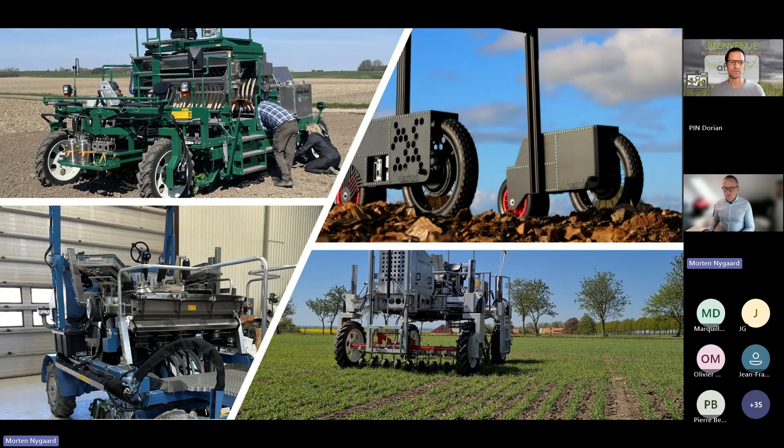You can start, Morten. You see the presentation now? Yes, we see it. So thank you, first of all, thank you for being able to join the AFMEX conference and for the introduction by Dorian.

And yes, I am here to present Technical Solutions for Agrosciences, a Danish company which is providing field trial equipment. This is our specialty and what we actually do. And I am going to share the portfolio which we have put together, calling it Precision Plot. Precision Plot contains a plot seeding unit.

It contains a plot sprayer to come, I will end up presenting that. And we also operate with plot fertilization. Additionally, in the work we're doing, we are looking into yield estimation by camera together with Harvest Eye as an example. So, our tool carrier.

So implementation of autonomy in field science. So why does it matter? Well, we are all being told to act more efficiently. And normally I would say we cannot run faster, but we can run more efficiently. And here we need to implement technology.

So normally a seeding platform contains a staff of 2, but by implementation of autonomy in here, we can actually reduce that.

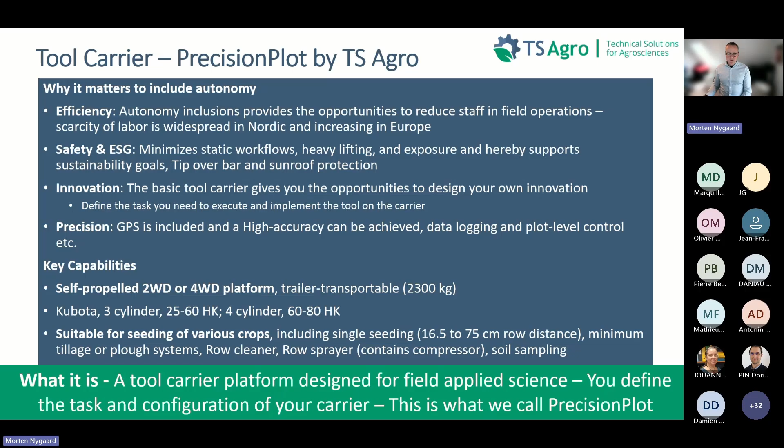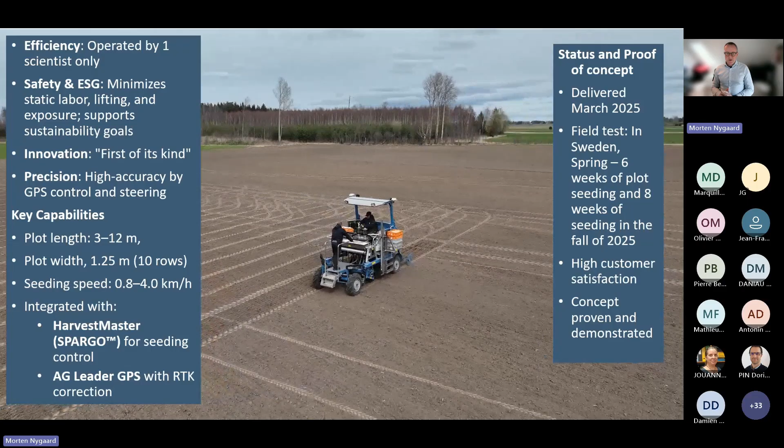So as a starting point, the carrier became a plot seeding unit for variety and fertilizer testing. We have now proof of concept. We have a unit which is now operated by one scientist. We have been called by our competitors first of its kind. It is acting on high accuracy based on implementation of GPS controlling.

We operate with plot length from 3 to 12 meters, depending on needs. We have a plot width of 1.25. And on this version, we have integrated SPARGO from HarvestMaster for seeding control. And we are operating with GPS RTK from AgLeader.

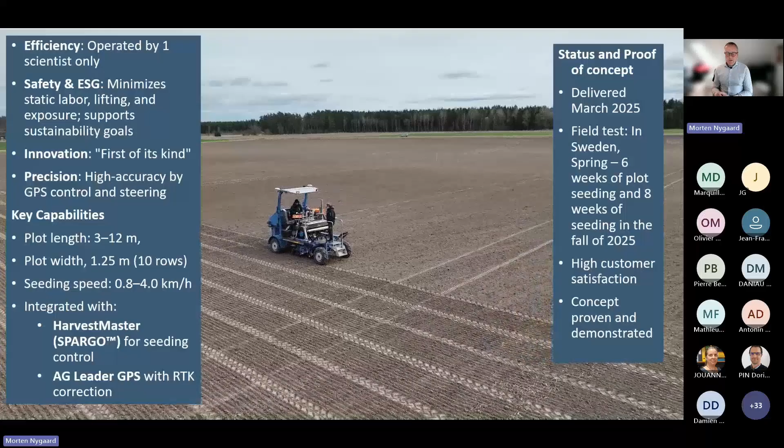The concept was delivered in March '25, so close to a year ago. It has had a spring season and an autumn season where the customer is expressing high satisfaction, and therefore we now consider it a proven concept.

When you go closer to it, from the seeding platform on your left side, you have access to, in this case, 2 belted cones. You have access to a seeding box.

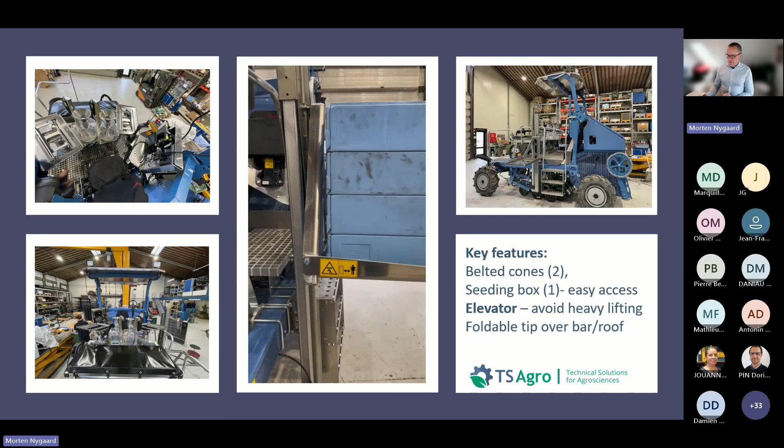From a work environment perspective, we have implemented an elevator. We all know the weight of a seeding box full of bagged seed - it's heavy, and now we can actually elevate it from ground level to the seeding platform. When not used, it's easy to fold and thereby not be in conflict with any other operations.

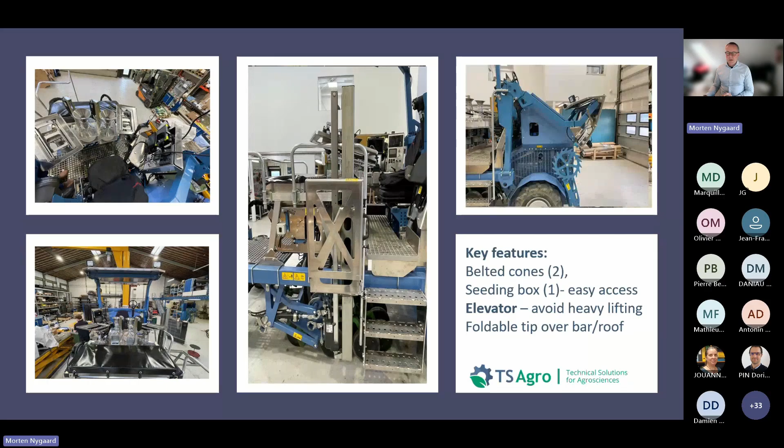On your right, you see the toolbar, including a roof. This toolbar can be folded on the back of the machine and thereby going into transport mode. Transportation is on a standard trailer. This improves the agility, meaning you have a larger operation radius, so you can actually define the target and go for that specific field you need. It has an actual weight of 2,300 kilos, so it fits behind a standard car.

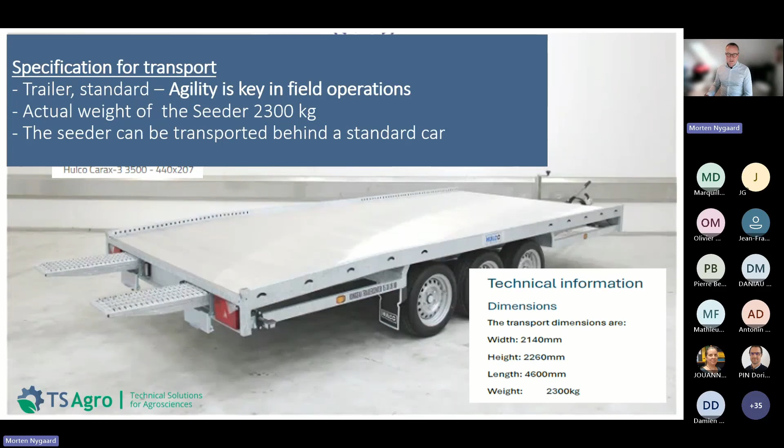More details: the center wheel is 150, we have an axle distance of 3. The fertilization application for granules is, in this case, Rotec disc, 5 rows with a 25 centimeter distance.

You can adjust the seeding depth independently from the seeding units. The seeding units use gravity, meaning no air, for seeding cereals, canola, beans, peas, grass. We have implemented TwinTec from Amazone with a 12.5 centimeter distance.

Again, you can adjust the seeding units independently from the fertilizer disc. In the center, you can actually see that you can also seed grass with this setup. We have mounted, in this case, 2 belted cones.

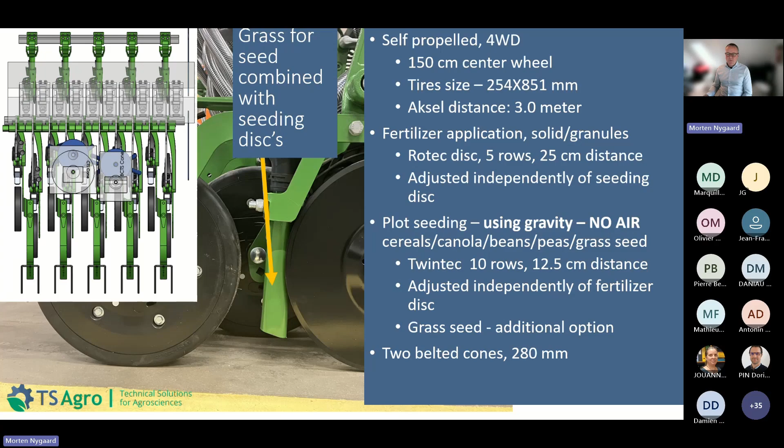From a fertilizer perspective, we have a seeding box and a cone planter. This means that we have 2 entries to the fertilizer disc, and we have 1 entry into the disc for seeding. The seeder platform has 1 seat in driving direction.

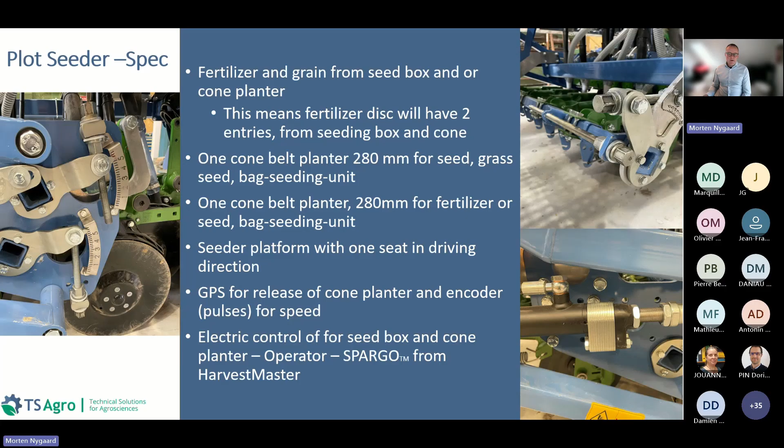We are utilizing GPS for the cone planter, and we have an encoder, so pulses for speed. We are utilizing SPARGO from HarvestMaster to control the cone. Seeding depth is easy to adjust, with simple operational maneuvers.

In the front of a traditional seeding platform, you will have a driver function. But in this case, we don't have the driver - instead we have provided a safe and easy access to the seeding box, again avoiding heavy lifting and climbing on top of machines.

Here we have simple, easy access to a seeding box, which is simple in its construction, easily calibrated. It's electric control, which means that you can actually enter multiple rates which you can easily shift between. So maintenance while seeding is hereby an option provided here.

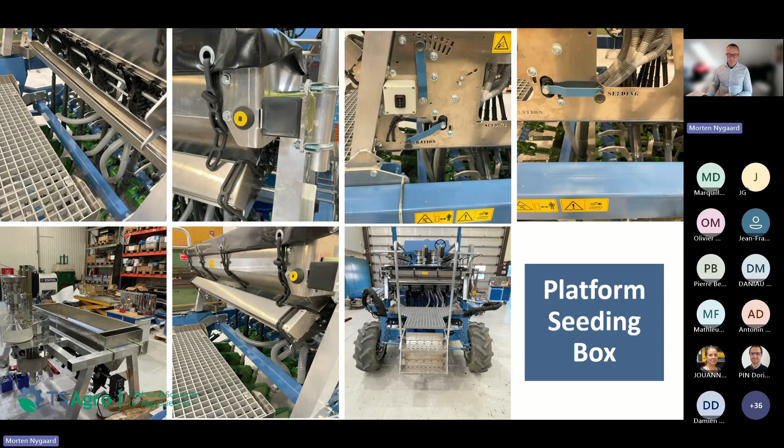Some of the ideas which we are currently working on with our tool carrier is to implement single seeding units, which will be able to seed a wide range of crops, from canola to beans, with a row distance of 16.5 to 20 centimeters, depending on the seeding units which we are utilizing.

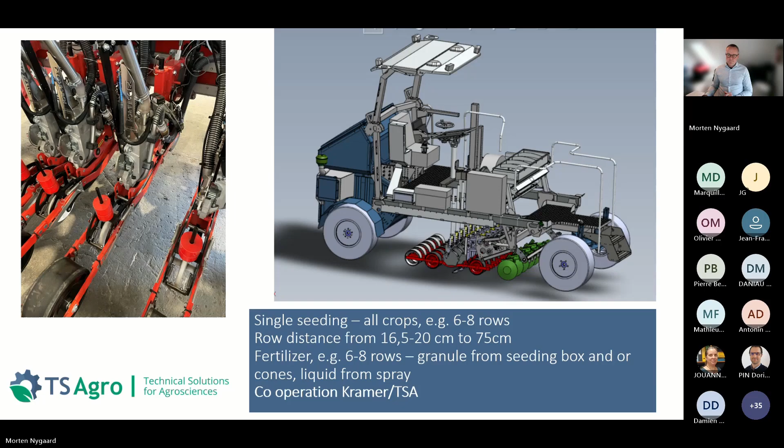Design and data management: you can work from ARM, Excel, etc., just as providing it with a CSV file, so we can push the design to the platform and we can seed based on that, either SPARGO or FieldPro from Kramer.

The FieldPro actually has a barcode solution, so in 2026 we will implement the ability to scan your bagged seed prior to seeding.

The Kramer system also provides documentation of seed counts. The single seeding unit is actually able to count the seed which is going through, and there's a camera installed as well, so you can monitor the flow. Some of the future ideas is to mount camera technology for multiple purposes on the same unit.

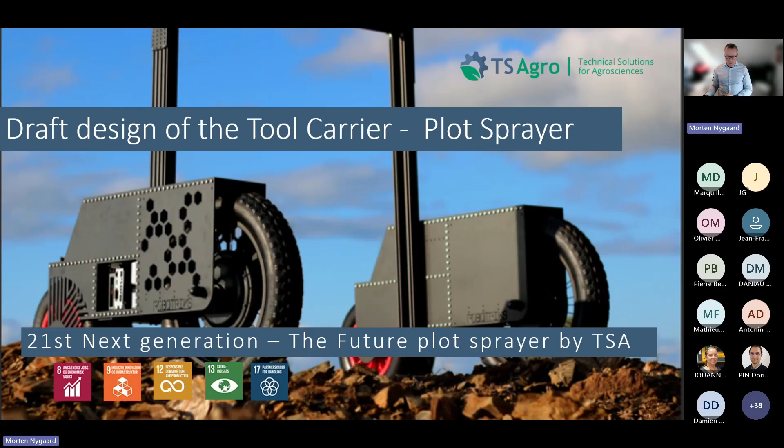So I'm saying we are to provide the 21st century's next generation of future plot sprayers.

So it's not only me or TS Agro. I have a production site called Fidan Engineering. We have a Danish company called Danfoil, a farm sprayer producer which also has injection capability. We are working with Ag Precision, a provider of GPS by Ag Leader, and we have another Danish startup company working with a vision system. They are called PearPlant. The structure of this project is put into 4 work packages.

So starting off, we will be working on a graphical user interface. I'll give you an overview later. We need a unit for controlling the semi-autonomous sprayer.

I want to implement injection. Why? Because I want to work with a closed system for pesticide handling and hereby safe operation with pesticides. Secondly, I want to achieve that we can do up to 24 different treatments without pre-mixing.

Another element is application technology. As I said, we are utilizing low drift flat fan nozzles for the majority of our trials. If you look at farm sprayers, they are far more advanced in application technology—air assisted, angled nozzles, all kinds of technology. Basically, one of the ideas with this project is also to pave the path forward for a reduction of pesticides or fertilization through implementation of application technology.

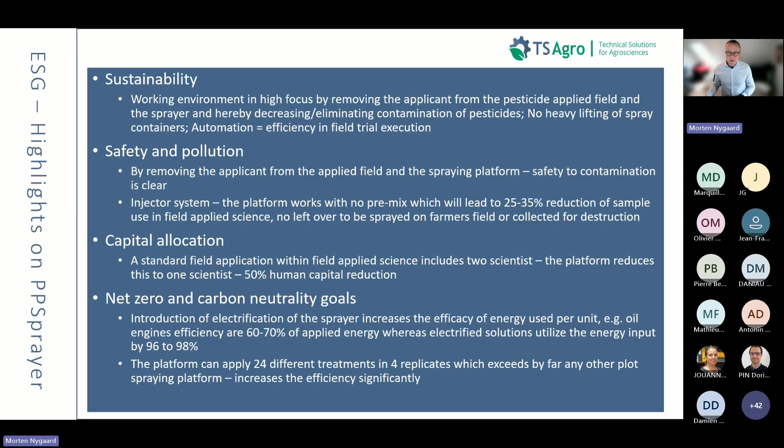So we started in February last year with an application. We got funding in August and the project is ongoing. We are doing the demand specification. All the initial starting is ongoing, and we expect to have a prototype for field testing in autumn of 2026. We have a platform targeted as available for March 2027.

So thank you. Sorry for my French—I would have loved to be able to speak your wonderful language, but unfortunately I am not able. But I hope that you will support the mission and join this project. So thank you so much.

Thank you. Thank you for your contribution. We understand that precision plot—in the first part of your contribution—your precision plot is not just a simple tool carrier. I think it's a response to the current challenge of experimentation. And thank you for presenting your prototype project, I think it's really interesting.

Thank you, thank you. Morten, you are of course welcome at the equipment show in January, on the 21st of January 2027, if you want to come, it's all right for us. I have already blocked the calendar. Okay, thank you, I will be there. Thank you. Thank you.